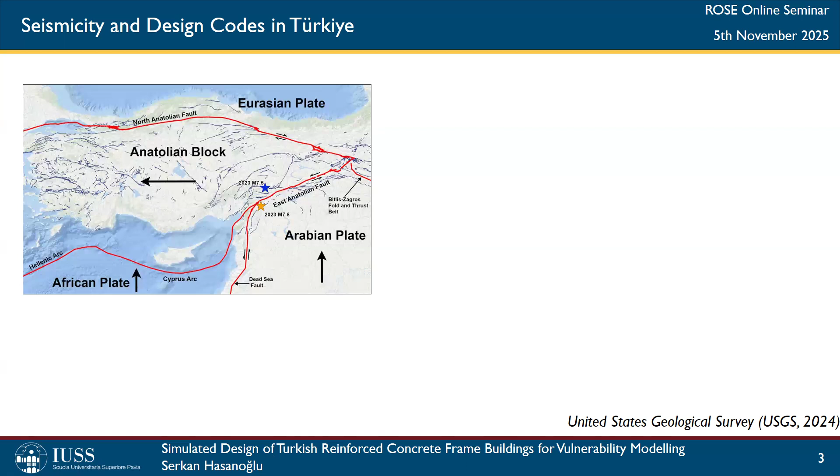Besides this tectonic setting, there is also an important tectonic setting in the region called the Aegean Graben system, which further increases the seismicity of the country. Due to this high seismicity, the country has experienced 21 earthquakes with moment magnitude of 7 or greater since 1900. Among the most devastating was the 1939 Erzincan earthquake with moment magnitude of 7.8, which caused more than 32,000 fatalities and about 100,000 injuries.

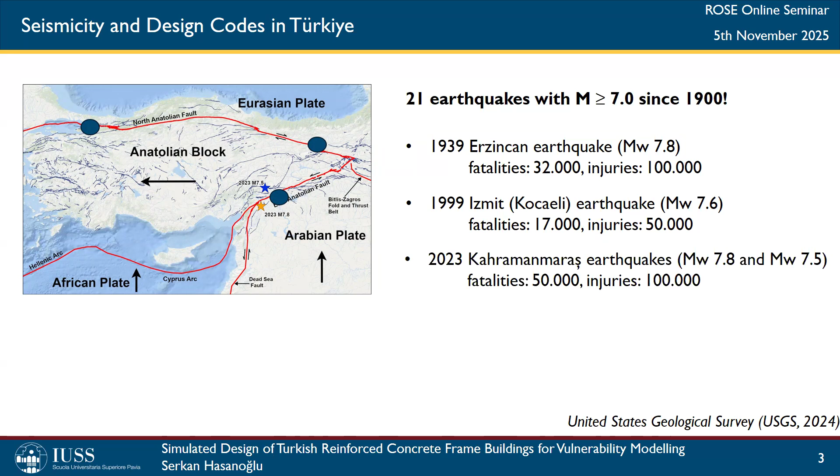Subsequently, the 1999 Izmit Kocaeli earthquake with moment magnitude of 7.6 also had very big catastrophic effects. And recently, the 2023 Kahramanmaraş earthquakes caused more than 50,000 fatalities and about 100,000 injuries.

Now, after this seismicity and the catastrophic effects the country has observed so far, I want to give some brief information about the design codes in the country from past to current time. The first building code in the country was introduced in 1940, and it was based on the Italian building code of that time. After this code, subsequent revisions were made, but none of these seismic design codes included details for the design of reinforced concrete frame type buildings.

In 1968, the first seismic design code which includes specific details for RC buildings was released, but it included only very minor details for the design procedures. In 1969, the first version of the TS500 code, which is the reinforced concrete design code in the country, was published. And in 1975, the first modern or comprehensive seismic design code was released, which included some details for ductility requirements at element and also structural level.

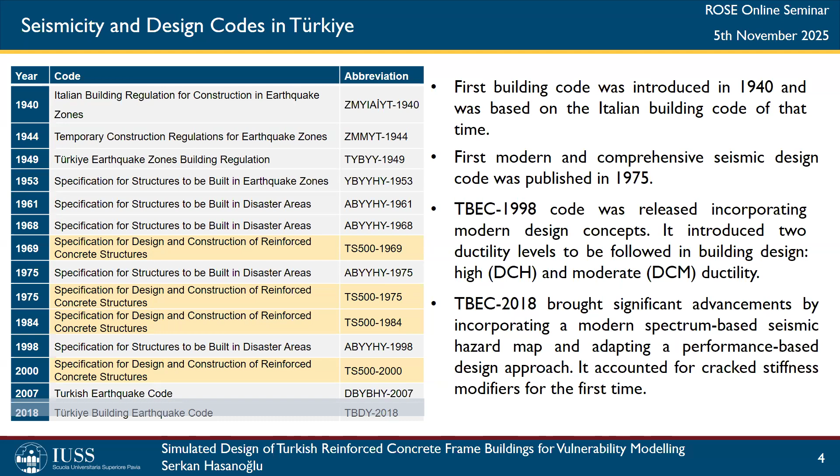Not only design regulations, but also the considered design forces changed over time. In the figure on the right, you'll see the variation of lateral load coefficients, which is defined as the ratio between the lateral earthquake load and the total structural weight. You'll see the variation of this parameter from the 1949 seismic design code to the last seismic design code of the country.

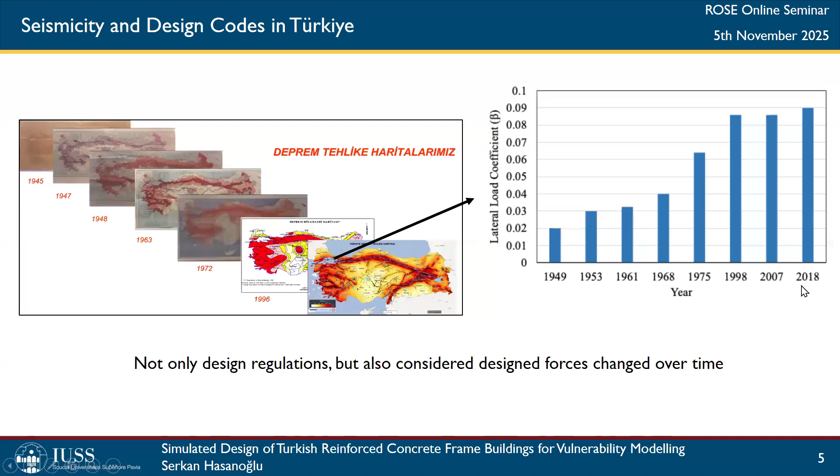And now in this slide, I summarized some important information for the RC building stock of the country. Mainly the mid-rise reinforced concrete frame type buildings constitute the dominant structural typology. And most of these buildings were constructed after 1980.

And also the seismic design codes, which were released after 1975, were at a good enough level, but many buildings constructed before 2000 exhibited significant structural deficiencies in the past catastrophic events. But the main reason behind these structural deficiencies was the non-engineered and unauthorized constructions, poor construction quality, and lack of an effective inspection system.

And in 1999, after the Kocaeli earthquake, a significant turning point occurred in the construction practice, and several changes happened. The first one was, of course, the seismic design codes began to be actively implemented in design procedures. Ready-mix concrete production spread throughout the country, and its use became mandatory. Also, the use of ribbed reinforcing steels became mandatory, and a construction inspection system was introduced in 2001. And because of these changes, the quality of construction improved dramatically.

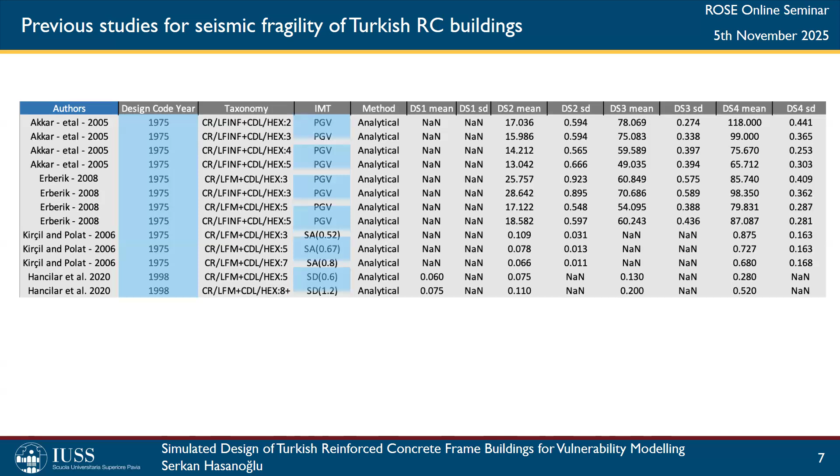When we look at the fragility curves generated for the Turkish RC frame type buildings, we can find several studies. Among these, Akkar et al. 2005, Erberik 2008, Kırçıl and Polat 2006 studied the buildings constructed before 2000. And Hancılar et al. 2020 studied the buildings constructed after 2000. And all of these studies use different modeling and analysis methods, and also utilize different intensity measure types.

Now I will start talking about the simulated design framework. But before starting, I just want to give the main motivation behind it. As you all know, the existing vulnerability models are difficult to use for large-scale assessments for several reasons. Because they are mainly developed using different numerical modeling and assessment approaches, they generally lack clarity regarding design rules. They were developed for different intensity measure types, different damage measures, different damage state definitions, thresholds, etc. And they use broad building class definitions. And in most cases, they rely on limited archetype structures, which causes failing to capture building-to-building variability.

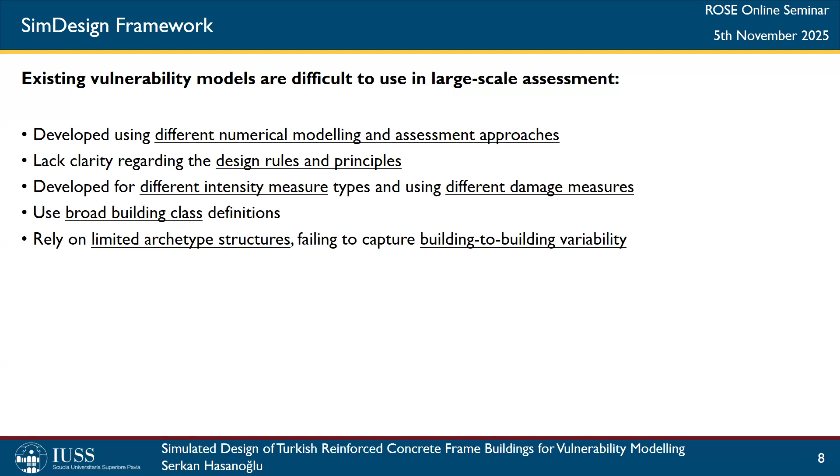And especially because of the last point, recently a simulated design framework was developed as a part of the Built Environment Data Initiative, and its source code is available on GitHub. Actually, this code was adopted in the European Seismic Risk Model 2020. If you check the fragility curves utilized for reinforced concrete frame type buildings in this project, all these fragility curves were developed using this code.

The framework requires several inputs. First of all, structural system. The original code was prepared only for reinforced concrete frame type buildings, but other structural systems are aimed to be integrated in the future. And the original code for the RC frame type buildings was generated for general European RC frame buildings, and there four distinct design classes were developed for different levels of seismic design considerations, from no seismic design to modern design which includes capacity design requirements.

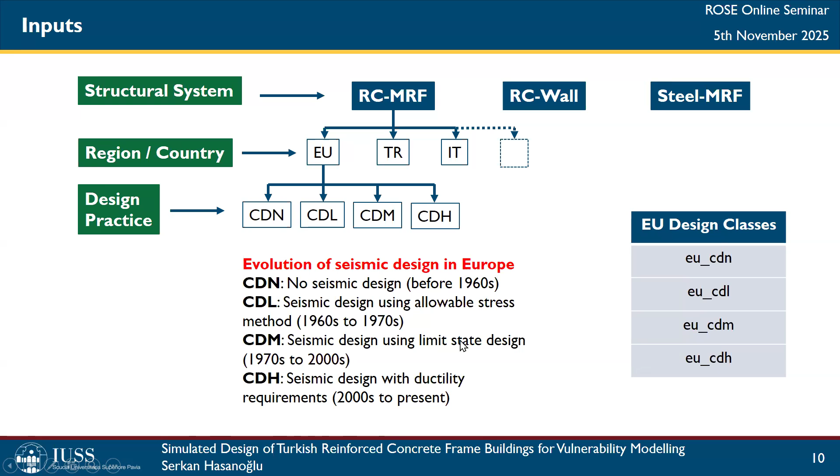But all countries may have different design procedures, design rules. Even if two countries follow the same design rules, they may have some differences in their structural properties, maybe in their geometries, material preferences, etc. For this purpose, it is necessary to integrate some country-specific design classes into the framework. So I developed 5 different design classes representing the Turkish reinforced concrete frame building typologies.

And the abbreviation was constituted by simply connecting the terms. The first term represents the name of the country. The second term represents the construction period. And lastly, the last term is the level of ductility to be followed in design. And this is the case only for the buildings constructed after 2000, as given in the design codes of the country. Besides the structural system and design classes, the other required parameters are the beta coefficient, and also number of stories and portfolio size.

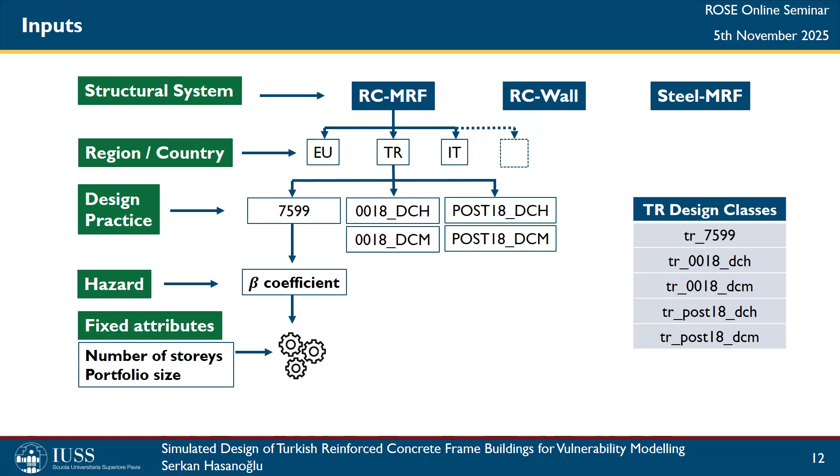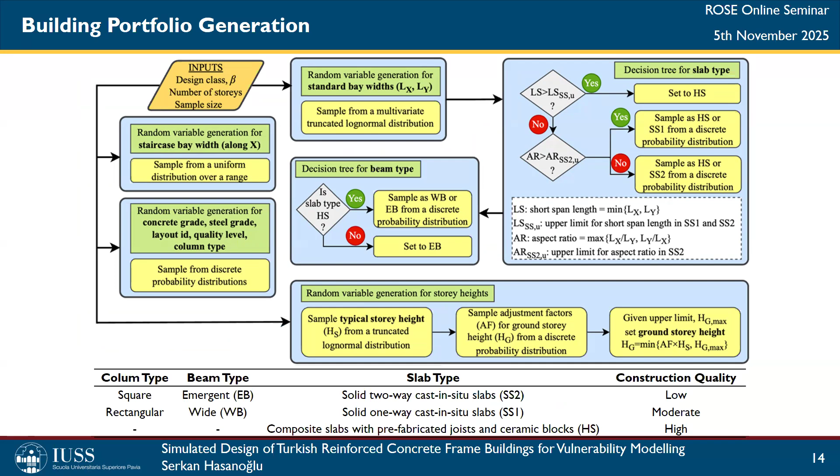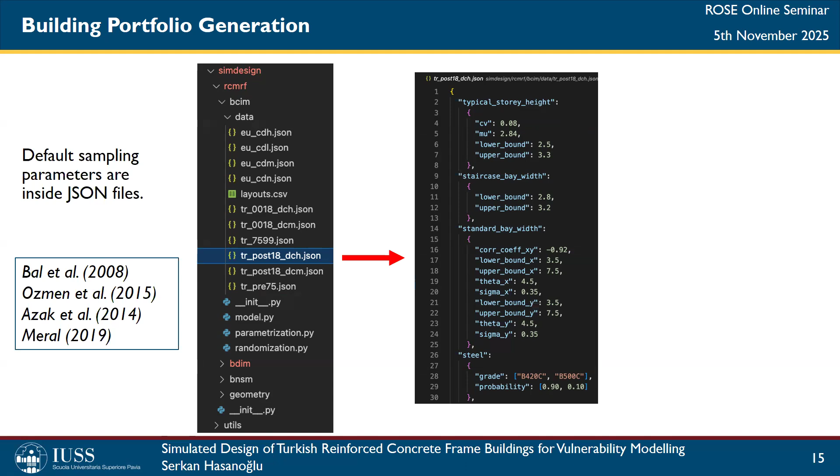When we give these required parameters to the framework, it starts the random sampling process to calculate several building attributes. For this purpose, different probability distributions are required to calculate all the parameters that you see here in bold. And the required probability distributions are generally available in the literature. For Turkish building classes, I utilized the studies you are seeing here on the left, with the main reference of Bal et al. 2008. And I integrated the required probability data into these JSON files prepared for the Turkish design classes.

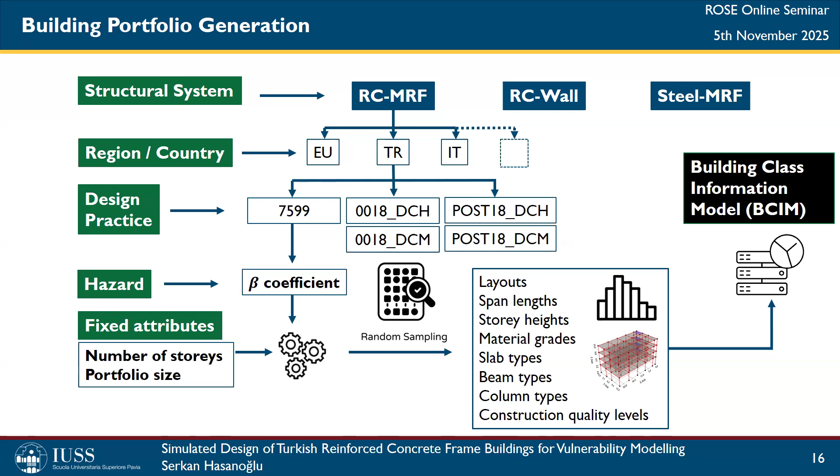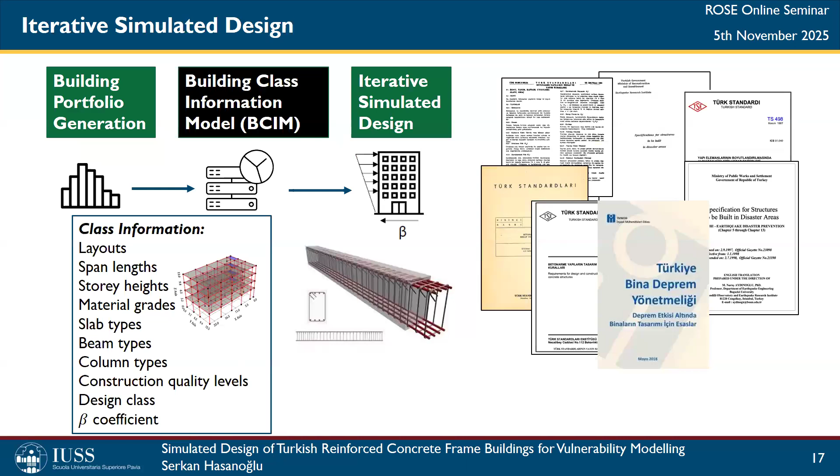And after finishing the sampling phase, all these attributes are stored in a Python class called building class information model. And the iterative simulated design procedure is initiated. This process is actually the main part that I worked on, because it was necessary to understand and code all of the Turkish design codes, the seismic design codes as well as the RC design codes.

And now I will show you the design algorithm that the framework follows. It mainly starts by defining the preliminary section dimensions according to the minimum design requirements of each seismic design code. And then it runs some linear elastic analysis for all load cases, which are defined according to the load combinations defined in design codes. After that, the section dimensions are controlled.

If they are adequate, section reinforcements are started to be calculated. And after this process, the design is again checked. Some ductility requirements are checked in this process, for example. And if the design is adequate in this phase, the design is finished with a solution. And for the design of section reinforcements, first the longitudinal and transverse reinforcements of beams are calculated, and then longitudinal and transverse reinforcements for columns are calculated.

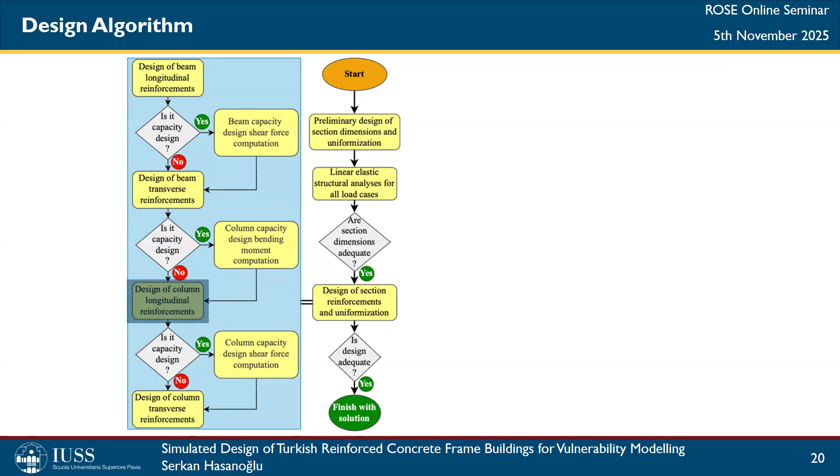And in all of these steps, I integrated the required data for Turkish design codes. And of course, if the capacity designs are followed, additional design forces were added to design forces to consider the strong column weak beam principle. And differently from the European design classes, for the design of longitudinal reinforcements, I developed a longitudinal reinforcement area calculator for biaxially loaded reinforced concrete rectangular column sections, and prepared some design charts for columns for different steel types and for varying axial load ratios.

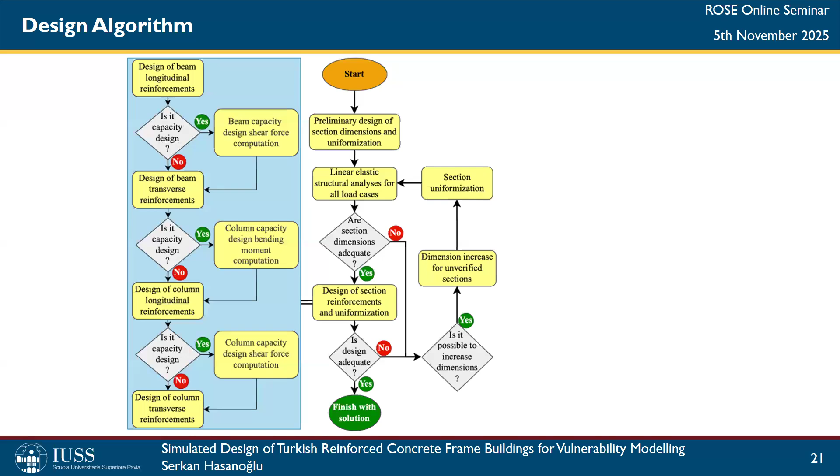And after calculating these reinforcements, the code checks the section dimensions and requirements. If it is okay, the code gives a solution model. But if it is not the case, the section dimensions may be increased. If it is not possible, beam types, material types, and column types can be changed, and all the process can repeat afterwards.

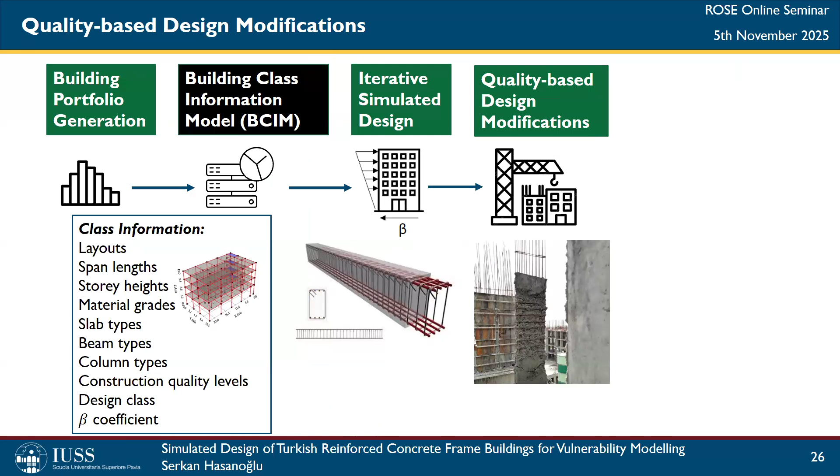But this process is applicable only for code-conformed buildings, but this is not the case for the buildings constructed before 2000 in Turkey. For this purpose, I also tried to calibrate the quality factor to match the design attributes with the probability distributions in the literature for these design attributes.

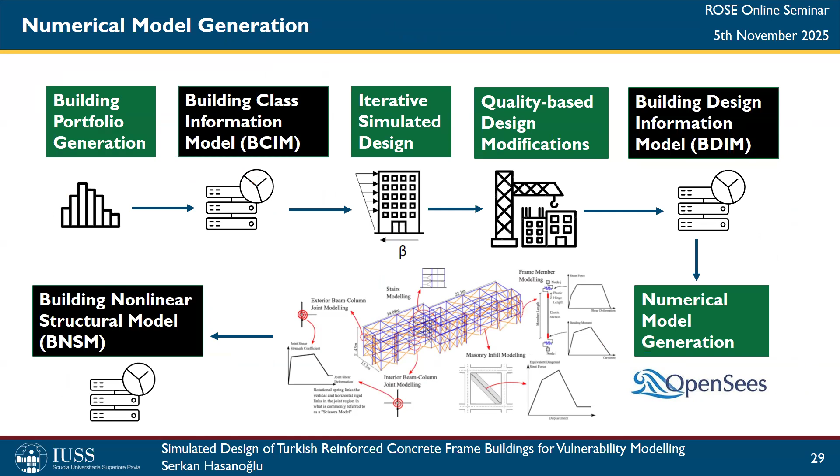And after this step, design attributes are stored in the BDIM class and numerical model generation is initiated. In this process, the concentrated plasticity approach is followed by using state-of-the-art methods in the literature. I will not go into detail in this part because they were already presented in the previous ROSE seminar.

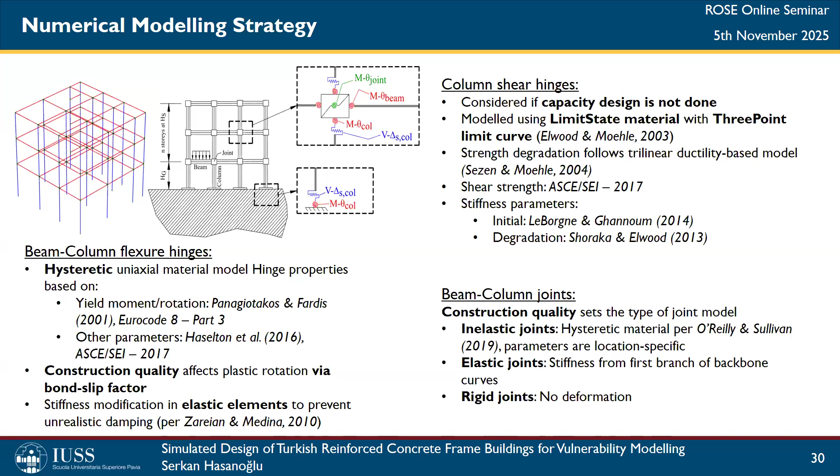Now I will give you some example application results. In the first example application, I generated 100 different four-story building models for each design class defined here in the table. And the beta values were calculated assuming the buildings are located in a stiff sandy soil site in Zeytinburnu district of Istanbul, and assuming that the building's height is 12 meters, and calculated the approximate fundamental period of vibration by using the empirical equation in the

2018 design code. And also I included EU CDL and EU CDH design classes into the analysis because they were utilized to represent the RC frame buildings in the European seismic risk model study. And also the moderate ductility cases were not allowed in this study area, but I included them just to make a comparison. And all the other parameters were defined by engineering judgment by looking at the seismic design codes and also the probability distributions in the literature for material properties.

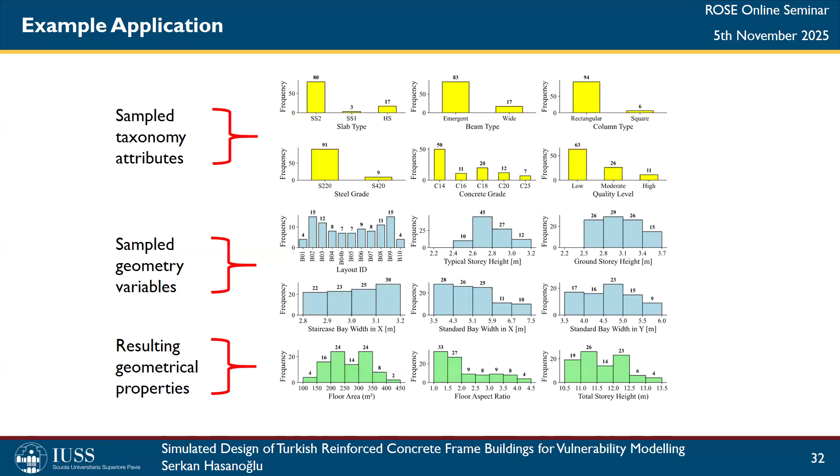In this figure, you basically see the sampled taxonomy attributes and geometry variables. You see the variability that exists in the simulated models, which inherently shows the variability of the simulated building models. And after generating the building models, I applied nonlinear static pushover analysis on each building model for X and Y directions.

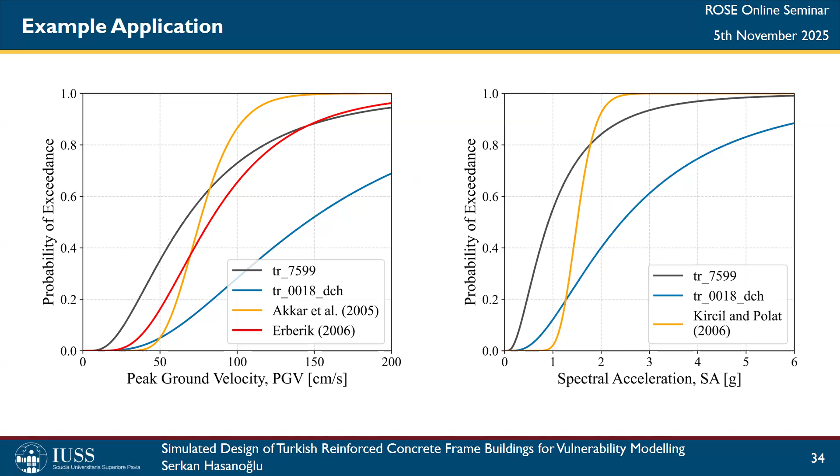And after that, by using these fragility curves, I conducted a probabilistic seismic hazard analysis in the study region and combined the fragility curves and used damage-to-loss ratio models in the literature, Martins and Silva 2021, and got these loss-related outputs. As you see here, for example, expected annual loss ratios for the buildings constructed before 2000 are extremely high compared to the buildings constructed after 2000, as expected.

I also compared the mean annual frequency of collapse values and added the suggested threshold value given by ASCE. As you see here, the threshold is far below the value calculated for the TR0018 DCH class. The reason may be that we didn't include infill walls. But even if we included them, it is certain that we will not reach that suggested limit.

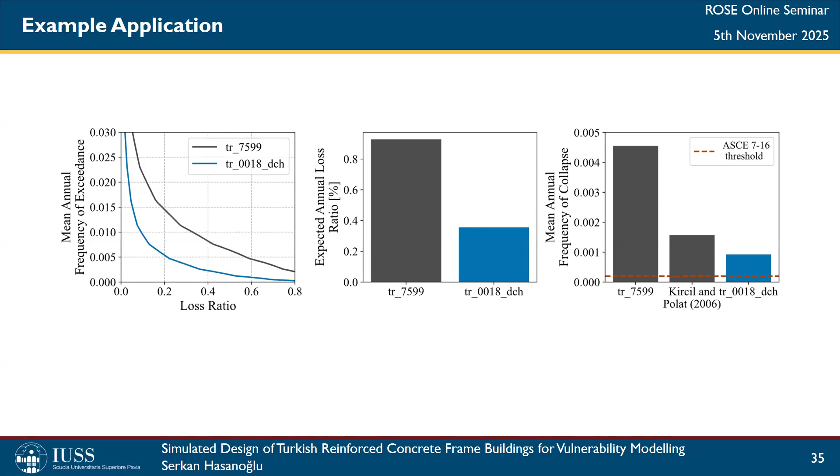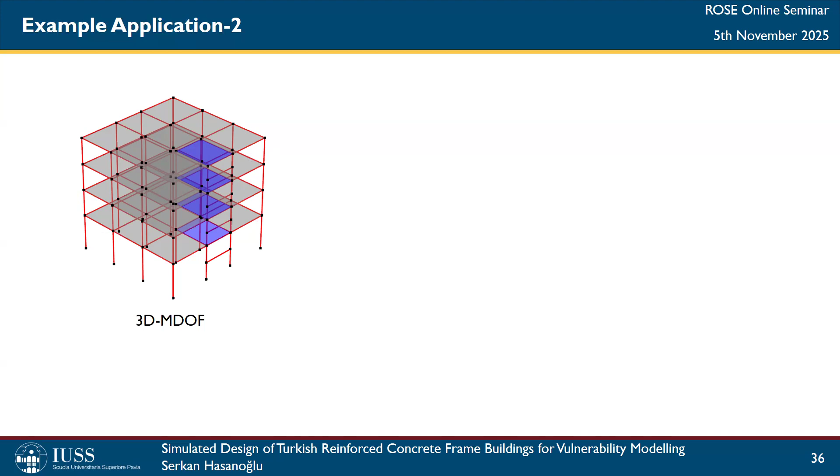And in the second application, I investigated the effect of different modeling and assessment approaches. Basically, I generated 100 different 3D multi-degree of freedom models, then converted them to equivalent single degree of freedom alternatives, and also I generated stick-type reduced order multi-degree of freedom models, which the recent version of the vulnerability modeling toolkit of GEM is based on.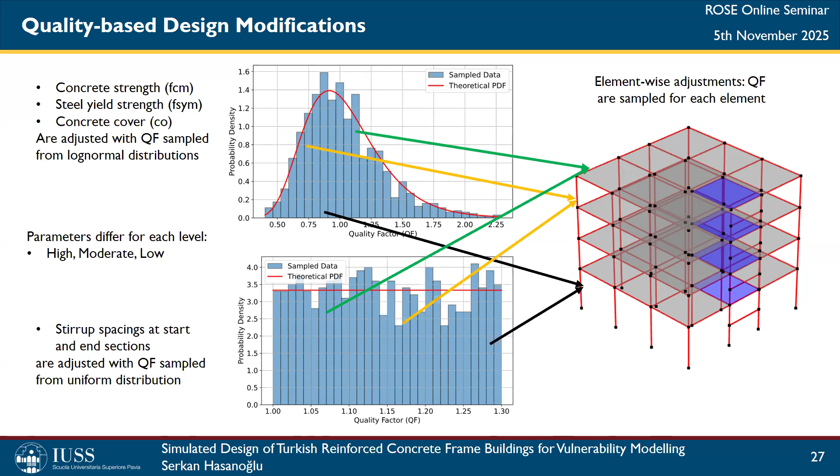Because otherwise it doesn't make sense to use the building models, because for example, for concrete strength, if we just use some empirical equations for the expected values of concrete strength, for example, C14 concrete, it is around 18 megapascal. But when we see the concrete strength values in the country, in most of the cases for C14 type concrete, it is lower than 10 megapascal. So I also needed to decrease the median values of the quality factor. That was the reason behind the calibration.

And do you know, like, the values you found in literature are based on real data? Yeah, they are based on real data that people gathered in Turkey, of course. Because I was thinking, if you wanted to apply this framework on a different country, it might be hard maybe for that particular one. Yeah, of course. But you found them. Yeah, from the literature, and all of these studies were investigating the Turkish buildings.

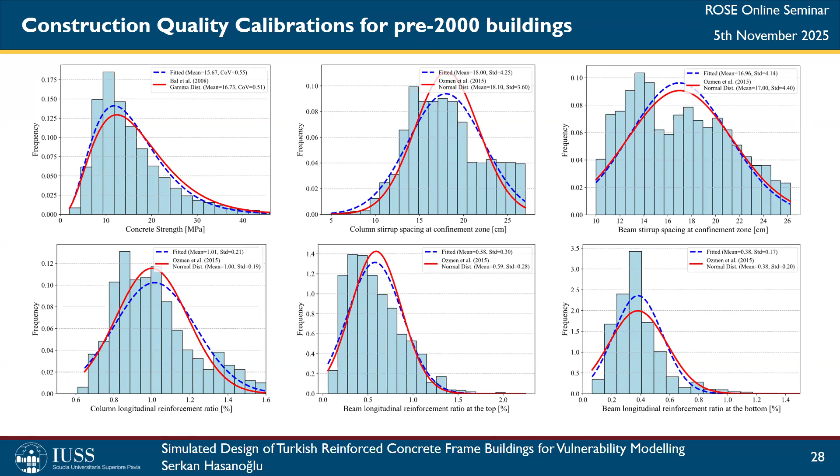Very well. I have just one question, and I see the curves. In 2018 we changed the code. And when I see the median curves, if I'm not seeing wrong, what is the difference between post 2018 and 2000 to 2018? Yeah. And I think the reason will be because the betas are almost the same. And are you using different quality factors? Quality factors are also very similar. Okay.

So you basically consider that post 2000 buildings have a similar beta. Yeah, actually the values are all here. For example, for post 18, these are the quality factors. 80% of the buildings have high quality for post 18, and for the other design class it is 60%, but it is not that big a difference, I can say. It's interesting to see that the building code changed and the end result is not changing. Yeah, maybe the economical effects might be different. We don't know. Investigate them as well.

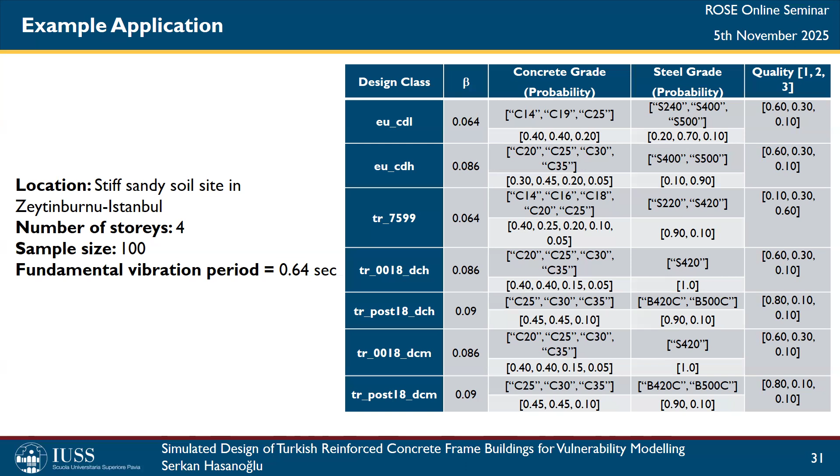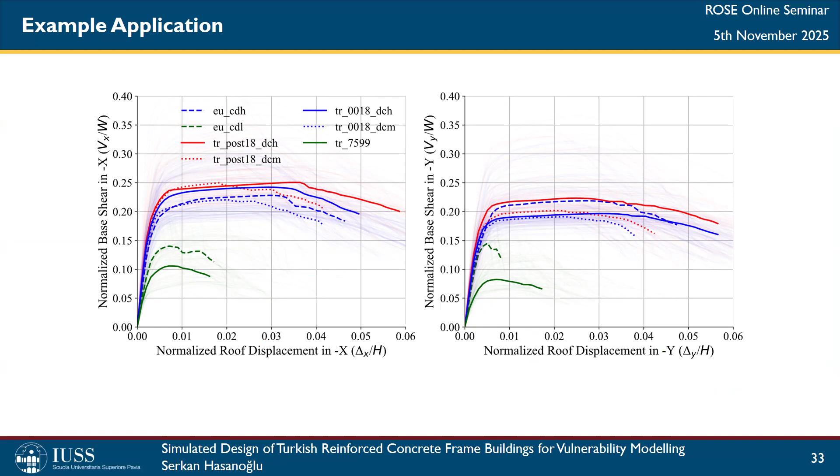Yeah, the level of ductility, if I'm not wrong, in the last design code it is 8. In the previous code, I think it was 7. Just a little difference there. And the beta value is the same, so the strength values are similar for that reason. Maybe just because of the difference in R factor, there is some increase in the ductility level actually. And did you change anything in the model between those? No, they are the same. Here we assume no shear failure at all.